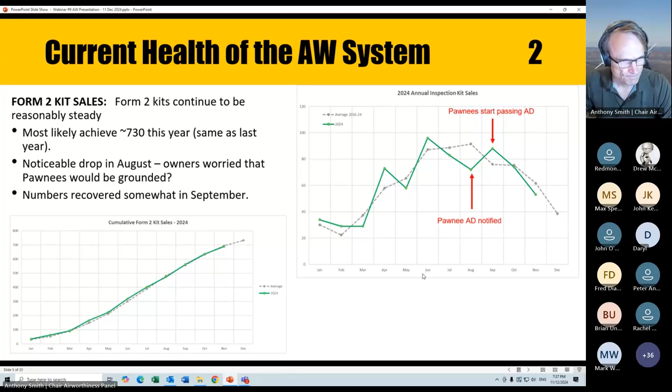That's where we're at with the Form 2 kit sales per year. I've estimated the actual result for this year, but it's going to be pretty close. Since this does constitute the lion's share of the income for airworthiness and how we fund it within Gliding Australia, the secret would be to get more aircraft in the air. That would then either allow more work to be done in the airworthiness sphere or a drop in the price of the annual inspection kit.

So I use that as a bit of a proxy for membership. Where the rest of Gliding Australia's income comes from membership fees, Airworthiness gets its funding from annual inspection kit sales.

The current health of where we're at with authorisations or ratings over the last 5 years is relatively steady. This shows the highest rating someone has in a particular area - so if you are an annual inspector, you'll automatically have the component replacement rating as well, but I haven't included those in the numbers. If the highest rating you have is a component replacement, you'll be included in that category. So relatively constant over the last 5 years - the number of women inspectors and younger inspectors is constant.

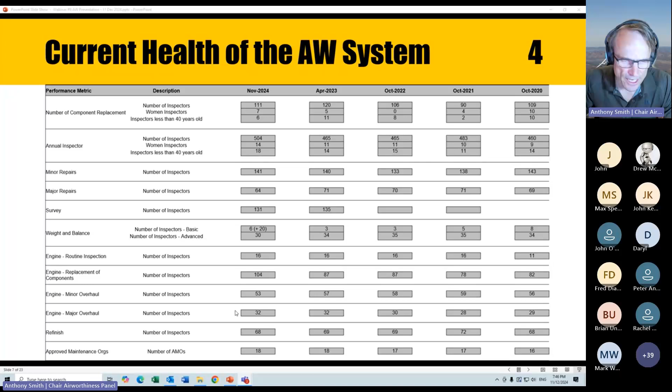Audits, as I alluded to before, fell into a huge hole around the COVID era. People were reluctant to visit other clubs either because they didn't want the risk of spreading COVID or catching it themselves, and we had a very large backlog accumulate over those 2 years. There's been a huge effort by the RMAs and other volunteers to recover from this over the last 12 months, which was part of why there was an increase in airworthiness expenses. It was covering the costs of getting people out to the clubs.

However, audits continue to be a bit of a rub point, and it's been proposed to change the audit system from every 2 years to every 4 years. Now, this is not necessarily guaranteed at this point, this is a proposal. So move it out to every 4 years with a self-audit questionnaire at the 2-year mark.

Now, I've seen a draft of that self-audit questionnaire. That needs a bit more work. It needs to be rigorous enough to be of value to the club to sit down and do it, but it doesn't necessarily need to be 18 or 20 pages, which is so intimidating that no one gets around to doing it. So it needs a little bit of work to develop that further and to try and find that even balance between something that's useful and something that's not overly burdensome.

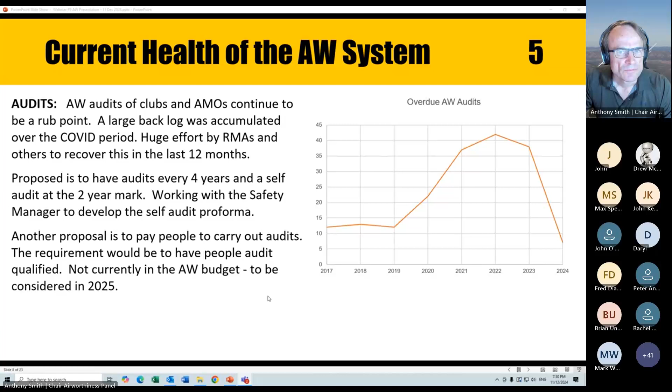So coming up soon, I ran the two courses for weight and balance at Benalla and Gawler respectively. There are quite a few suggestions that came out of that, being the first two courses that had been run since we've achieved the weight and balance approval. So there's a couple of changes in the works for the weight and balance manual out of that. One was to include a lot more worked examples for all the equations featured in the manual, mostly in section 6, and the addition of a flowchart for the weighing process.

So that's a one-pager that you could print out or copy and have with you when you're doing the weighing to follow the bouncing ball.

At the moment, the next weight and balance course is scheduled for the 15th and 16th of February in Queensland. I'm just waiting for confirmation of those dates and the location. I did have either Caboolture or Kingaroy suggested, but just waiting to hear back from the Queenslanders.

So, Scott, you wanted to ask a question? I'll see if I can unmute you. I've done it. Okay, you've done it.

So we had the backup or second signature thing, which was going to be via that software, which last I heard wasn't fully approved yet. Has that got any further?

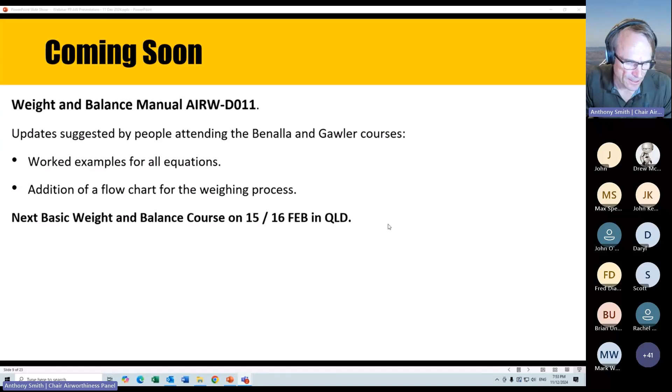And there were a few people who sadly did not pass the course in Benalla and Gawler, and they'll be invited along to refresh some brain cells there on mathematics and use of equations. I'll get details out to them either late this year or early next year.

The flavour of the month for the last three or four months of my life are the Pawnee inspections. The CASA equivalent in Argentina, ANAC, issued an airworthiness directive in mid-July. That was a result of three crashes involving failure of the front spar on Pawnees.

Now, one of those was highly publicised. It was all over YouTube. And if you log into YouTube and search for plane crash baby gender reveal, I think it still comes up fairly promptly.

This AD requires inspection of the front spar in key areas for corrosion. Now, the corrosion is most likely from exposure to superphosphate. It is corrosive with aluminium. Misdrilled holes, which form potential crack sites, and cracks originating either from the misdrilled holes or from the corrosion.

The inspections required two service bulletins from Lavia SA, Service Bulletin 09 and Service Bulletin 11. One of the catches there was Service Bulletin 11 was only available in Spanish. Now, I've since heard that there is an official English version available, but I haven't been able to get my mitts on it just yet.

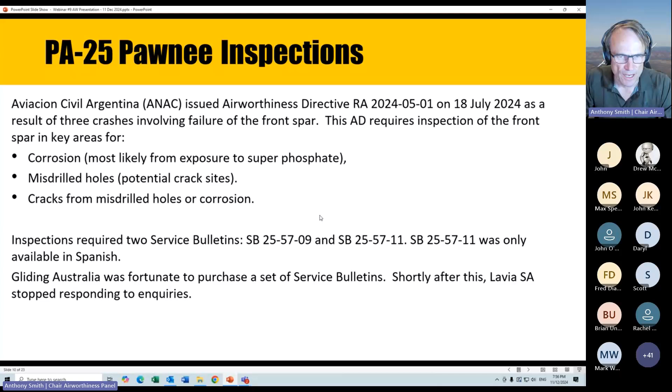This is a photo of a bare Pawnee wing. It shows the two areas that were in the Argentine investigation report, an accident in Argentina just outside of the hand walk area, and an accident in Colombia, which was a little further outboard. I don't have details of where the spar on the Mexican crash failed, but from the video it looks fairly inboard.

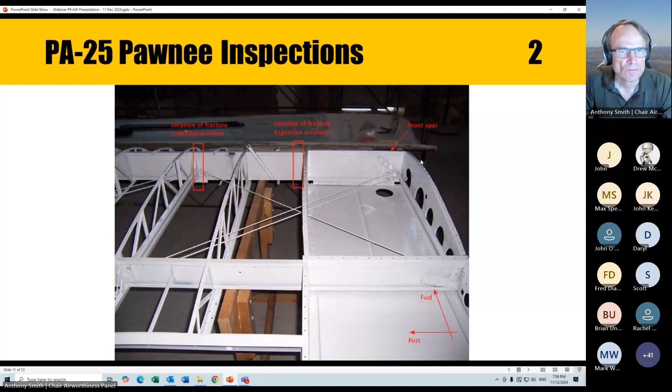Given the agricultural history of most of the Pawnee fleet used in gliding, there's a pretty high risk of finding misdrilled holes and other problems in the spars. These are sins of the past where, with the leading edge change, you fold the leading edge skins back over the spar flanges, and then people just drilled holes wherever they felt like, or about there somewhere, which was unfortunate. They either didn't understand or didn't have the skills to reacquire and re-drill the hole through the skin into where the existing hole was.

At the time, I was somewhat pessimistic, expecting up to 70% of the Pawnees used in aerotowing would not pass one or both of the requirements, based on the fact that almost all the aircraft have an agricultural history, and some of the leading edge changes may have been somewhat literally agricultural in nature, thinking cowboys with drills here.

We were, I think, exceptionally fortunate, with only 14, or 35%, of the Pawnees failing one or both of the inspections. I suspect a lot of the Pawnees have had spar replacements either during conversion or rebuilding into tow planes or something similar. Can't quite believe we had such a high percentage get through, given some of their history.

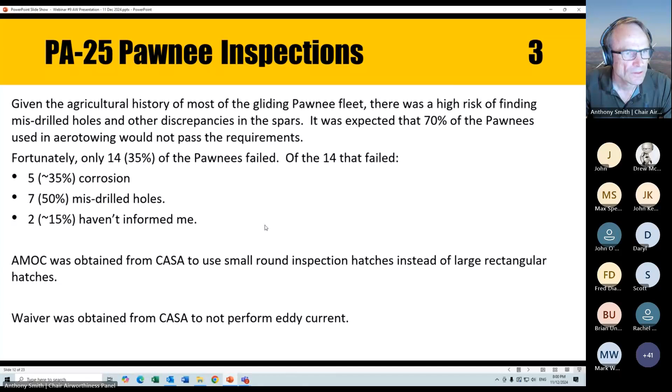As I said before, we've recently just re-established communications with Lavia SA. I've now got a direct email to one of their engineers, rather than the generic admin inbox that the rest of the world is using. I have done a draft fatigue analysis on the front spar, looking at a number of issues, and I have provided a draft of that to the engineers at Lavia SA. I've requested that they provide me access to the original Piper spar stress analysis, and they're looking at granting that at the moment.

That will enable me to verify that the stress analysis I did from first principles is close to accurate, or as close as I can get. And we can then move forward and see if we can get the fatigue analysis checked and approved, and hopefully that will enable us to extend the reinspection interval considerably.

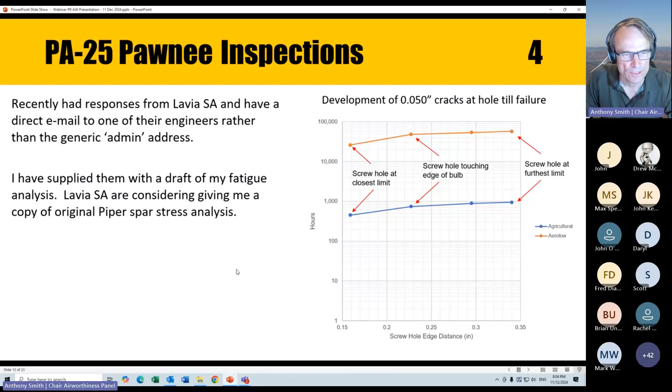Now for Max, what does the bulb mean? I don't think I've got a cross section immediately to hand. The spar has an I-beam shape where the ends of the I-beam caps are turned down with vertical flanges. At the bottom end of those flanges, or the free end, it's reinforced by a bulge. If I go to the next slide, that will show it right there.

So that is the cross section of the spar in grey. You've got the flange where the screw is the vertical element, and it's got that bulged area, called a bulb, at the end of that. There's a fair bit of cross-sectional area in that, and it's used to stiffen the flange to give it more resistance to buckling and failure in compression.

The one thing we're working on at the moment is a draft of a repair scheme. Lavia SA have confirmed to me that they do not have an approved repair scheme for the front spar other than complete spar replacement. The repair of the area is challenging, to say the least. The width of the spar cap is not really wide enough to get fasteners through it, at least structural fasteners that we want to use there.

It just simply hasn't got the width to put fasteners through. And putting a repair element on the vertical flange would get in the way of rib installations and skin installation and things like that. So the thing we are looking for at the moment is, for where we have misdrilled holes, to blend out the holes completely, so you have a very large scallop out of the web.

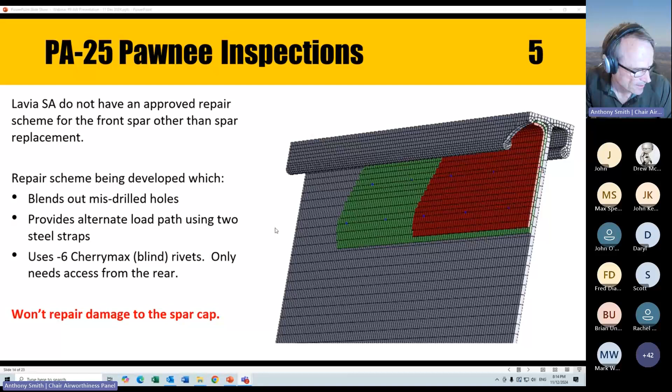There's that triangle of quality, speed, and cost - you can pick two out of three. We're keeping the cost down by using volunteers, but we need to keep the quality up instead, and the speed is the one that's going to be the penalty, the one that misses out. But we're working on it.

Moving on to incidents and defects. Most of the information is either from SOAR reports or defect reports, and that is all that I have. I do try to group these together in terms of theme or by aircraft type. I'm not picking on a particular manufacturer or a particular sailplane type - there is just an amount of coincidence involved sometimes.

And again, the caveat: it's not the purpose of either the aircraft incident investigation or a defect investigation to apportion blame or liability. We want to prevent the occurrence of accidents and incidents, and history has shown that if you start blaming people or assigning liability out of these things, people stop reporting them. We want people to report these, so we have the no blame culture. Any action that we take as a result of either the accident or the defect is to prevent the reoccurrence. We're not into punishing people.

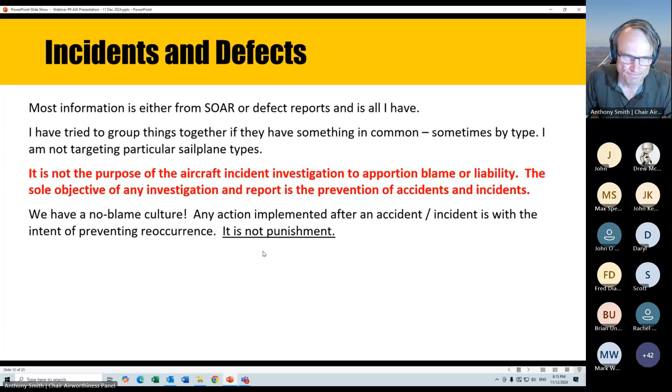So, DG 500 and DG 1000 - there was an AD that came out of DG for a large range of their models where the adjustment for backlash was being over-tightened, preventing the roller from moving to the full extent on the connecting track. In extreme circumstances, this was causing bending or fracture of the tie rod end.

Now, two DG 500s were inspected. One was tight and did not have full movement of the roller in the track. There was some wear evident on the roller as a result, but the rod end was not bent. The second aircraft that was inspected - again the fitting was tight, and the rod arm was in fact bent.

DG 1000 was also inspected - the aircraft connections there are related, or I think are even identical. Again, they found that it was over-tightening of the backlash screw, or the adjusting screw. And I have heard anecdotal evidence of other DGs finding this issue. So that's why the AD is out. Unfortunately, it does require replacement of the rod end, I believe.

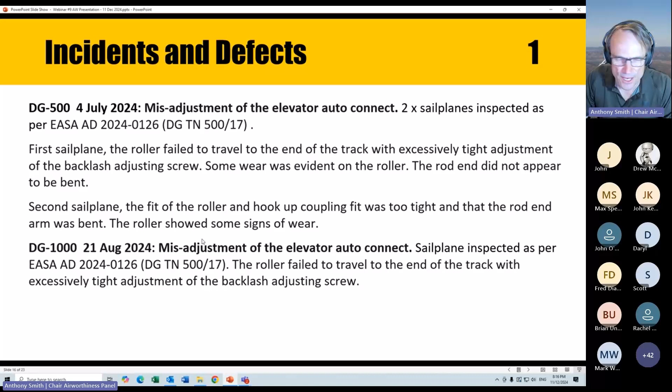What had happened was the two control rods on this bell crank were connected round the other way. So the rod from the cockpit was installed on the outer bearing and the rod to the elevator was installed on the inner bearing, resulting in less leverage being applied to the elevator. The unfortunate thing was this got through an annual inspection as assembled. There was a disconnect, if you pardon the pun, between the people at the club and where the annual inspection was being carried out.

The control deflections were being carried out at the club prior to the annual inspection, but at some point that wasn't being checked against data.

As it was, when it was connected round correctly as shown in the photo here, the elevator deflection was increased from 95 millimetres to 162 millimetres - so over 50% extra throw on the elevator deflection. So it's no surprise that there was now better speed control, but this could have been quite a serious incident as a result of these two rods being connected round the other way.

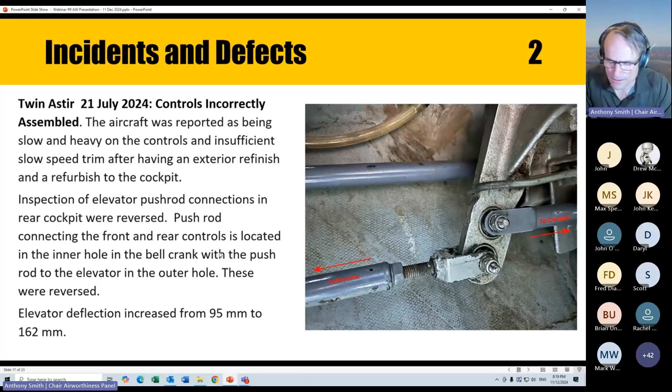However, this could have been particularly nasty, and there is action being taken now to improve the communication between the people at the club and where the annual inspections were being carried out.

A Tost main wheel, this is off a Duo Discus. I will say, without criticising the design, this is a -5 wheel on a fairly large 2-seat sailplane, where I thought maybe a -6 size wheel might have been a bit better.

During the survey of a Duo Discus, the main wheel hub was found to be badly cracked, with the crack running around at least half of the circumference. From the exterior, very hard to see because it was hidden behind the disc of the disc brake. I understand that the radial stiffeners on the other side of the flange are machined down to allow fitment of the disc brake, and so this area is not as stiff as the old drum brake arrangement possibly was.

2,143 landings on it. It had a previous weld repair in the area, and it looks like the crack's gone around the heat affected zone. I will say that for the cast aluminium, these weld repairs are typically a temporary repair or a stopgap measure, and if you do a weld repair to these cast aluminium wheels, it should be inspected quite thoroughly moving forwards, every annual inspection.

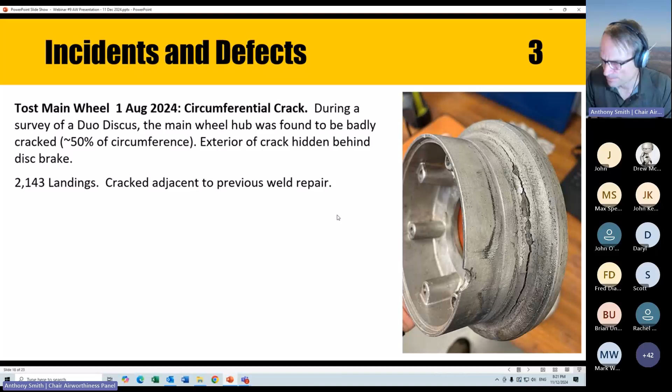JS1, a debond in the fin. Apparently this is a reasonably common occurrence on the type, not necessarily well reported. You have a stiffener that supports the upper rear trailing edge on the top of the fin. It doesn't connect that well structurally to the spar of the fin, and you get cracking or debonding in the corner there.

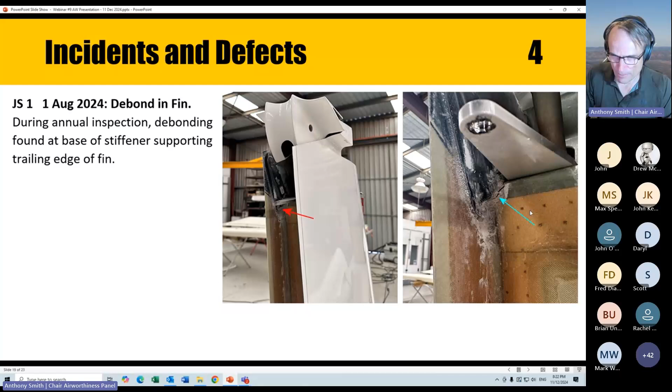I don't know what JS or Jonker are going to do with that kind of thing, but if it's been reported, you'll probably end up finding some kind of repair scheme that adds a bit more connection in between the spar web and that carbon fibre stiffener.

An interesting one, this is a DG500M with a cracked prop hub mounting plate. Now this aircraft has had this Solo 2625 engine fitted by supplemental type certificate and STC mod.

The prop hub is shrink fitted onto the drive shaft, onto the spindle. So the spindle's cooled down, the prop hub is heated up, so it expands, it's dropped over the shaft, and then when it's cooled down, there's an interference fit onto the shaft. This leads to very high circumferential stresses in the prop mounting plate. And this has resulted in stress corrosion cracking.

So you can see there has been an amount of corrosion taking place on the prop hub. So you have a crack forming as it corrodes, and as the crack levers open, it exposes fresh material for the corrosion to penetrate. And that's where you end up with this multi-site crack growth.

And these cracks will continue to grow until the circumferential stress is relieved. So once this crack at the top is broken through, it's relieved the stresses around that prop hub. The prop hub is probably going to start slipping on the shaft, and these cracks, other radial cracks, will cease growing because the stress is no longer being applied to them.

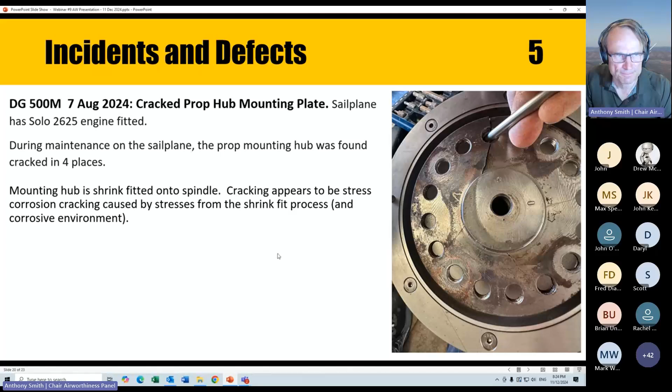A Pawnee, one that's actually flying, had jammed controls. The pilot was flying a 2-seat Pawnee. This is the one with a side-by-side seat. It's about 1.5 people wide. The pilot was wearing a noise-cancelling headset, and it has a little hand control in the middle of the lead.

After doing a number of tows, the pilot was on descent and found that they could not pull the stick back beyond the neutral point. Fortunately, the aircraft was landed safely. Post-flight, they found that the hand control for the headset had dropped down between the floor of the aircraft and the control stick fitting.

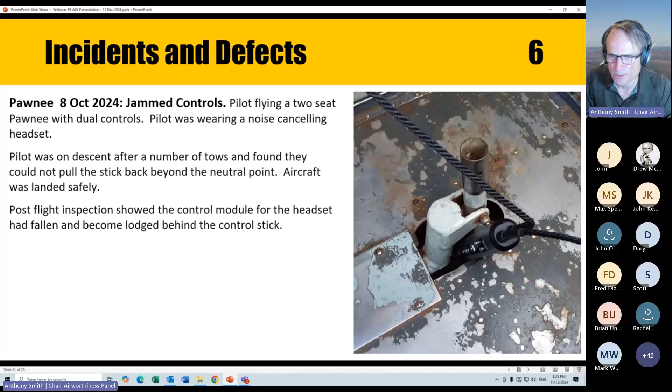I know a lot of the older, more vintage style aircraft were not traditionally fitted with stick boots, and quite a few aircraft have since been retrofitted with stick boots to try and prevent that kind of thing. It used to be that a lot of coins could get dropped. Carrying coins not so common anymore, but certainly pens and memory sticks and all sorts of other bits and pieces can end up falling into those control gaps and jamming things up without people realising.

An Astir CS77 with the flight controls not safetied appropriately. During daily inspection, one aileron and both air brakes, the L'Hotellier connectors, were found to not be correctly safety pinned. The connectors had been lubricated two weeks earlier.

There's no record in the maintenance release that an independent control check had been signed out after the controls were disconnected and reconnected with the lubrication. The sailplane flew several times on the day the connectors were lubricated, but had not been flown since, so it was picked up on the next DI.

If you attended any of the safety seminars that were held recently in Queensland, New South Wales, Western Australia, South Australia, you would have heard me talk about this kind of thing.

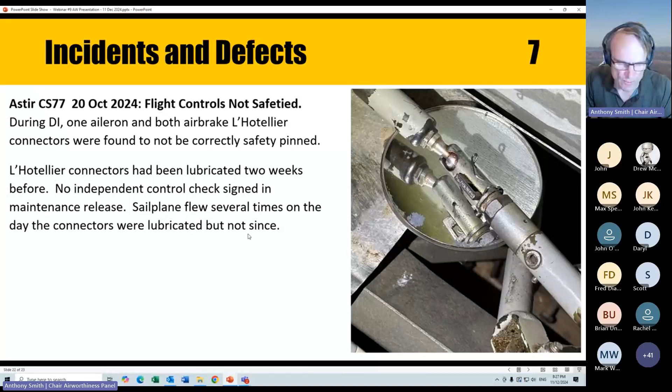All right, any questions? That's pretty much it from me. It's been a fun 5 years as chair of Airworthiness, and not without its challenges. I've had a lot of help from a lot of people, and from you, thank you very much. I certainly wish everyone a Merry Christmas and a lot of safe and happy flying over the next summer.

Yes, Fred. Fred, you got your hand up. Do you want to have a chat? Just a quick one, Anthony.

Thanks very much for your communications, mate. It's been absolutely brilliant. You actually feel like you're part of something with the work that you've done, and it's always easy to follow what's going on.

So that's great. My question is regarding airworthiness inspection renewals. At one stage, we were talking about doing them online or trying to get something happening, because it's real difficult to get a catch up on it.

Yeah, look, we do rely on the RMAs to run regular refresher training. I was looking at having an online exam after these sorts of webinars. However, I finished preparing the webinar at about 3:30 this afternoon and didn't have time to put together an exam on this one. And I've just been snowed under with Pawnee and other issues that I haven't had time to get fingers to keyboard.